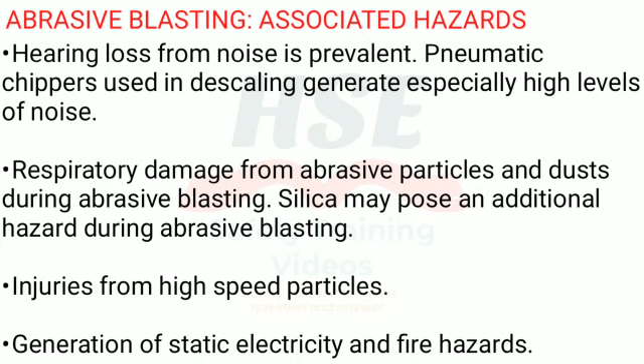Respiratory damage can result from abrasive particles and dusts during abrasive blasting. Silica may pose an additional hazard. Injuries can occur from high-speed particles, along with generation of static electricity and fire hazards.

Lead poisoning can occur during stripping and chipping operations. Flame stripping can vaporize lead paints, and chipping and cutting where lead paints are present creates lead-containing dusts.

Injuries from falls can occur, and surges from pressure drops in hose lines pose a special hazard. Injuries can result from ruptured air hose lines, and eye injuries from scale and rust.

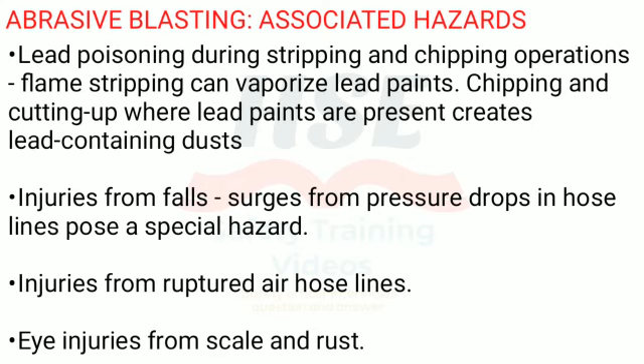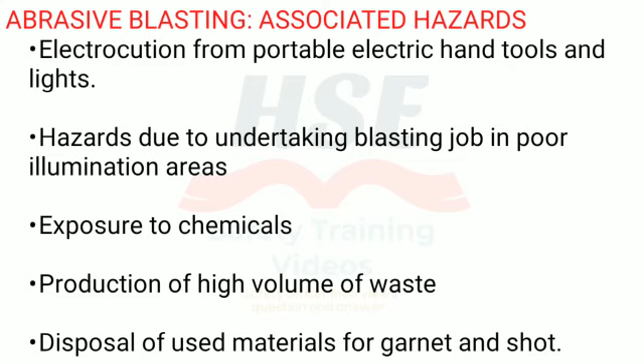Electrocution can occur from portable electric hand tools and lights, along with hazards due to undertaking blasting jobs in poor illumination areas. There is exposure to chemicals and production of a high volume of waste, including disposal of used materials for garnet and shot.

Regarding abrasive blasting safety considerations: while doing abrasive blasting, the blaster and the workers in the vicinity of the blasting operations shall wear approved breathing apparatus. The area shall be barricaded while blasting outdoors.

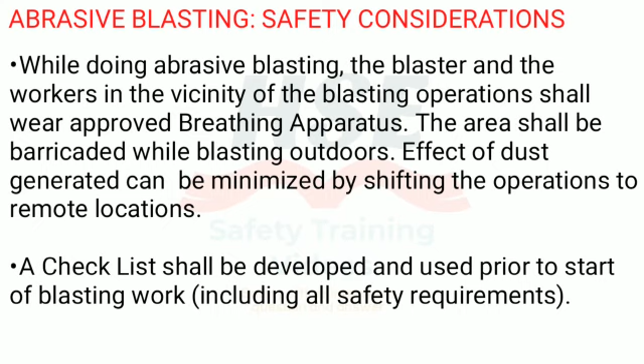The dust generated can be minimized by shifting the operations to remote locations. A checklist shall be developed and used prior to the start of blasting work, including all safety requirements. When blasting is to be done in a confined space, the area should be ventilated with an exhaust system.

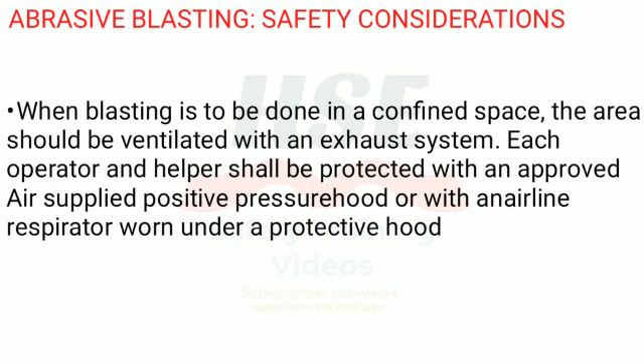Each operator and helper shall be protected with an approved air-supplied positive pressure hood, or with an airline respirator worn under a protective hood. Air supplied must be filtered and free from dust, oil vapors, moisture, or odors.

Non-lubricated breathing air compressors are preferred. Oil lubricated compressors shall have high temperature and carbon monoxide alarms to monitor carbon monoxide levels. If only a high-temperature alarm is used, the air supply shall be monitored quarterly using lab tests and daily using portable CO monitors. Non-lubricated breathing air compressors can also be utilized.

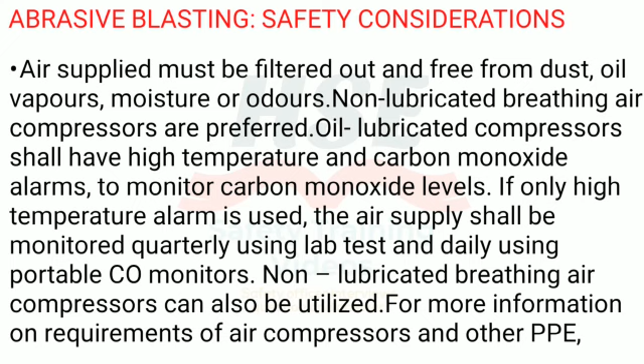For more information on requirements of air compressors and other PPE, type CE abrasive blasting hood as per NIOSH shall be used.

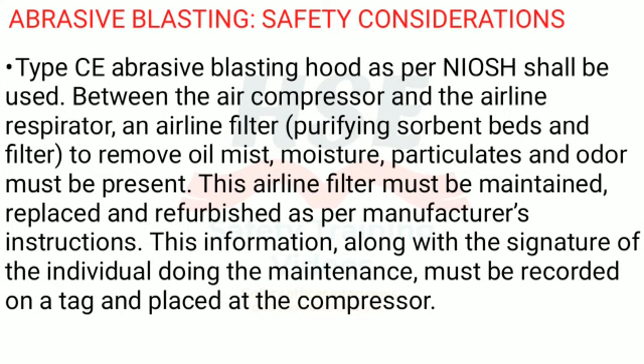Between the air compressor and the airline respirator, an airline filter, purifying sorbent beds and filter to remove oil mist, moisture, particulates and odor must be present. This airline filter must be maintained, replaced and refurbished as per manufacturer's instructions. This information, along with the signature of the individual doing the maintenance, must be recorded on a tag and placed at the compressor.

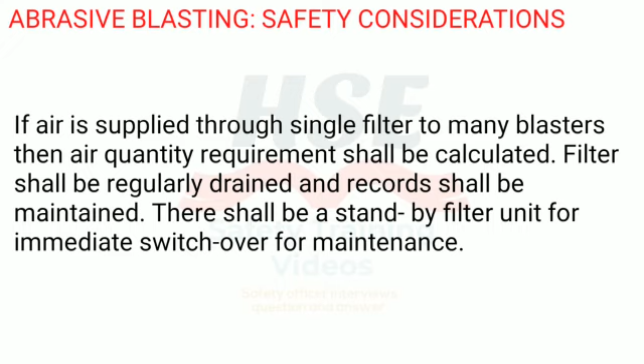If air is supplied through a single filter to many blasters, then air quantity requirement shall be calculated. Filters shall be regularly drained and records shall be maintained. There shall be a standby filter unit for immediate switchover for maintenance.

Keeping the air intake of the blower or compressor on the windward side of the blasting operation will prevent dust-laden air from being drawn in. It is important also that the intake be located where the air cannot become contaminated with carbon monoxide from the exhaust of the compressor engine. Other sources of contamination of the air supply, such as vapors, gases, and dust, are also to be avoided.

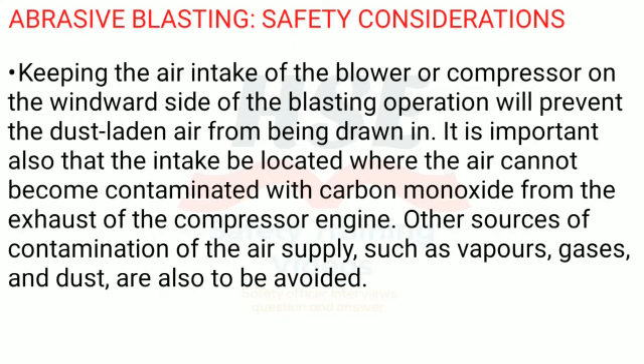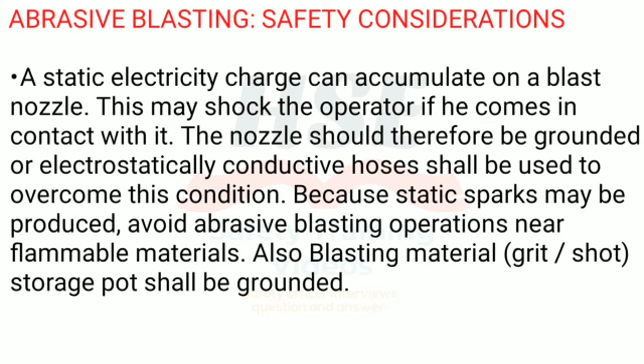A static electricity charge can accumulate on a blast nozzle. This may shock the operator if he comes in contact with it. The nozzle should therefore be grounded, or electrostatically conductive hoses shall be used to overcome this condition. Because static sparks may be produced, avoid abrasive blasting operations near flammable materials. Also, the blasting material, grit, shot, storage pot shall be grounded.

Avoid blasting on live lines or equipment. If it is necessary, then additional safety precautions like checking line thickness prior to blasting, ensuring minimum flow in a line, etc. shall be taken. A risk assessment shall be carried out in such situations.

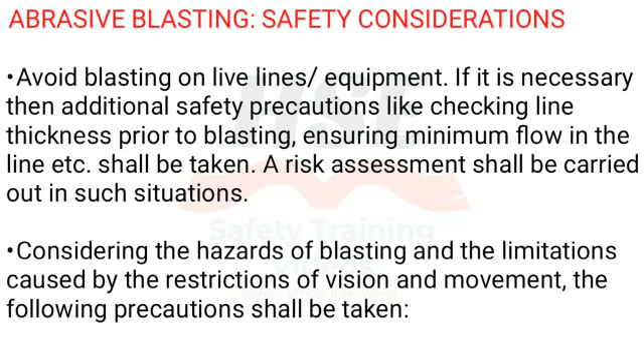Considering the hazards of blasting and the limitations caused by the restrictions of vision and movement, the following precautions shall be taken. In addition to the hood and respiratory protection, gauntlet gloves and canvas apron or other heavy clothing be worn while performing blasting work.

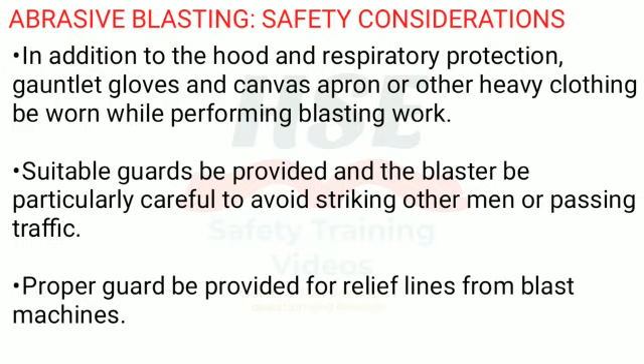Suitable guards be provided and the blaster be particularly careful to avoid striking other men or passing traffic. Proper guard be provided for relief lines from blast machines. Blast operations shall never be performed from a ladder. Appropriate scaffolding should be utilized on elevated jobs.

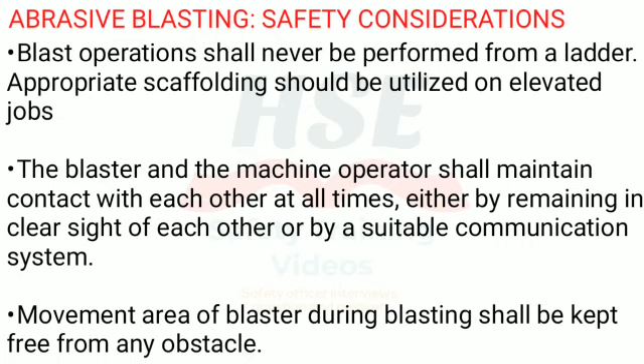The blaster and the machine operator shall maintain contact with each other at all times, either by remaining in clear sight of each other or by a suitable communication system. The movement area of the blaster during blasting shall be kept free from any obstacle. Dead man controls must be located near the blast nozzle so that they can be readily accessed by the nozzle operator. The dead man switch of the gun shall not be bypassed.

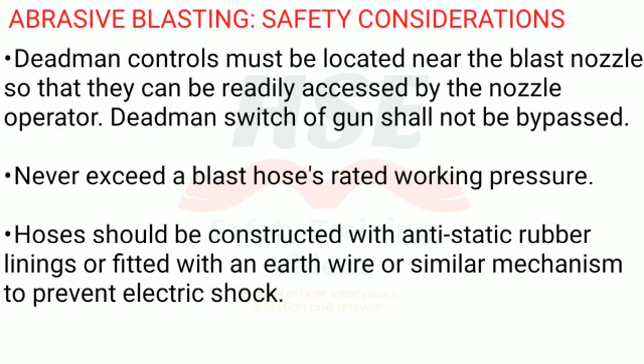Never exceed a blast hose's rated working pressure. Hoses should be constructed with anti-static rubber linings or fitted with an earth wire or similar mechanism to prevent electric shock. The hose from the pot to the blast nozzle should be kept as straight as possible. The use of sharp curves may create rapid wear on the hose, leading to the possibility of hose damage. Do not blast with a coiled hose.

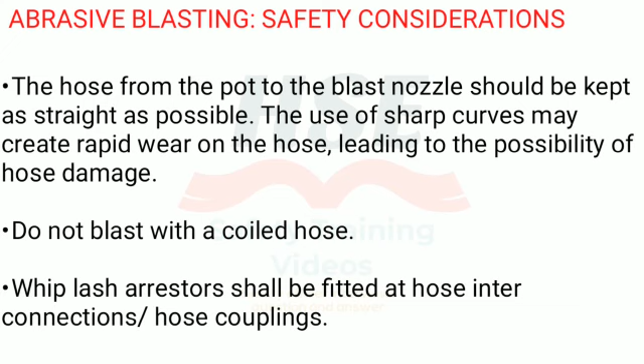Whiplash arresters shall be fitted at hose interconnections and hose couplings. Use safety cables to support the weight of elevated hoses. Damaged hoses shall be discarded. Do not attempt to use repaired hoses. Blast hoses shall be inspected before use for signs of wear and tear.

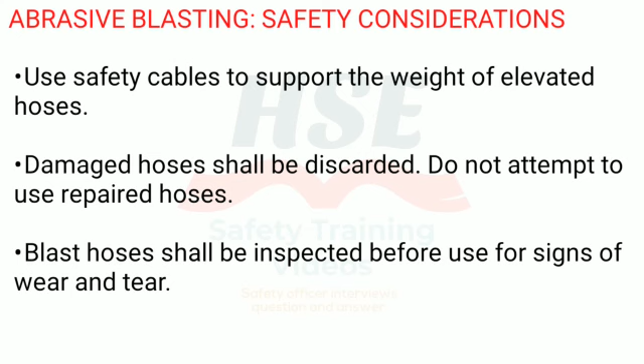Additional or specialized personal protective equipment as identified by the work permit and risk assessment shall be used. All hoses and fixtures used in the blasting circuit, like manifold, couplings, etc., shall conform to the procedure for temporary pipe and hose connections.

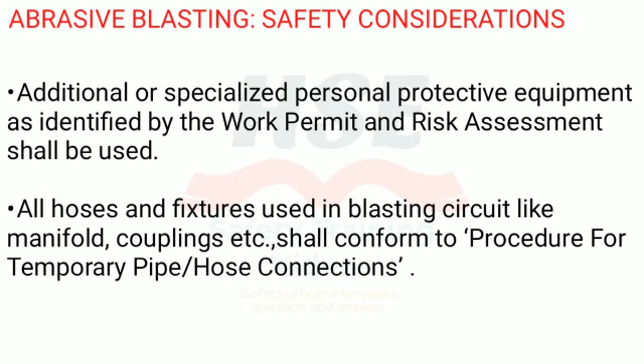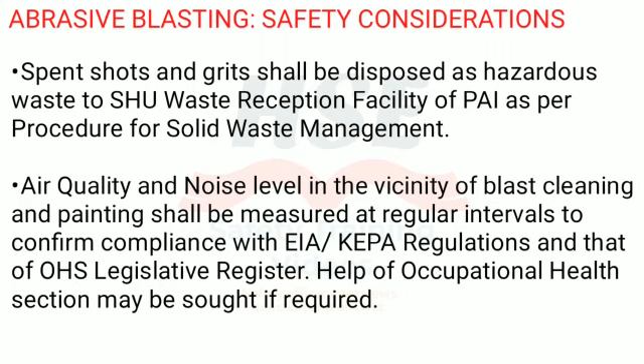Spent shots and grits shall be disposed of as hazardous waste to the SHU Waste Reception Facility as per procedure for solid waste management. Air quality and noise level in the vicinity of blast cleaning and painting shall be measured at regular intervals to confirm compliance with EIA/KEPA regulations and that of the OHS Legislative Register. Help of the Occupational Health section may be sought if required.